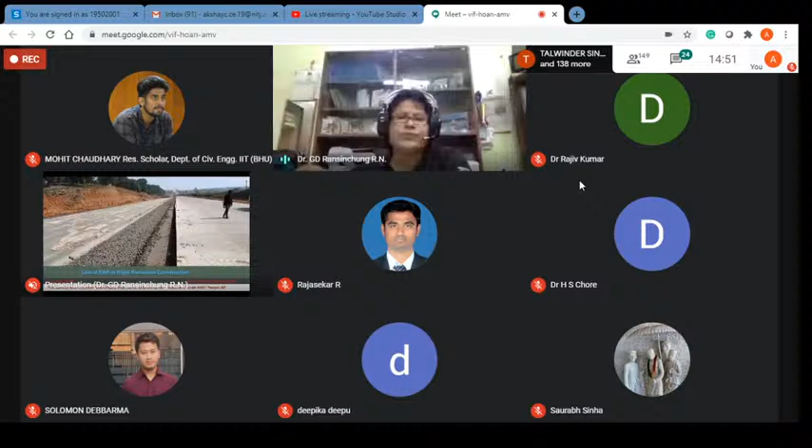Now, the topic is pertaining to construction of rigid pavement, so I thought of sharing with you this slide. This is a rigid pavement, and this particular picture was collected from 4-laning work from Hiran River to Sindoor River. It was part of National Highway number 12 under the National Highway Development Project phase 2 in the state of Madhya Pradesh. I had the opportunity to land up in this particular project as I was invited by the National Highway Authority of India and the consultant and contractors to address few issues.

So during that course of the site visit, I could capture this. I'm just sharing with you to show you the rigid pavement. On the right hand side, the pavement section is the rigid pavement section, rigid pavement slab, or I can say PQC slab. And on the left hand side is the DLC layer, dry lean concrete. So when I talk about the construction of rigid pavement, I cannot ignore the dry lean concrete layer.

So I shall be touching briefly the dry lean concrete part also. In my presentation, I shall be covering these four different heads. First of all, I shall be discussing the RAP materials, followed by RAP materials for dry lean concrete.

As I said, dry lean concrete serves as an upper sub-base in the rigid pavement system. I hope most of you know that in the rigid pavement system, we don't term it as base course. We don't have base course, we have sub-base. So though the GSB is also a sub-base, we term it as a lower sub-base and DLC as an upper sub-base. And then followed by RAP materials for PQC, basically the rigid pavement or cement concrete pavement.

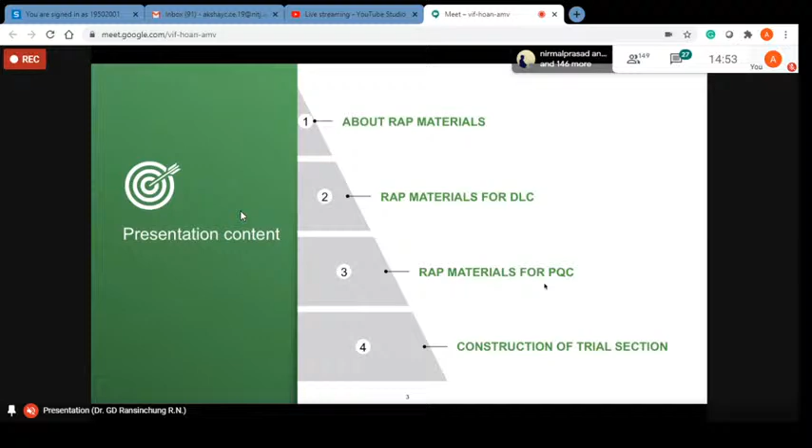And finally, the last part is the construction trial section that we carried out. Whenever we do research work, it is important, essential I would say, for researchers to compare the findings, whatever you get in the laboratory, to be able to get very closely in the field. In an attempt to do that, we have been able to construct a trial section, and in brief I shall be sharing it with you.

Coming to the introduction part, here I'll be briefly talking about the importance of the source of the RAP materials and the methods of collection of RAP, and most importantly, the quantity of RAP materials which are retrievable from the existing road network of the country. Because the idea to carry out this research work is to narrow down the gap between the demand and supply of stone aggregates, construction materials basically, right?

So we have a strong feeling that through this technology, we should be able to bridge, this may be one way out to bridge the gap between the demand and supply of construction materials, which is why I thought this is very important for me to address.

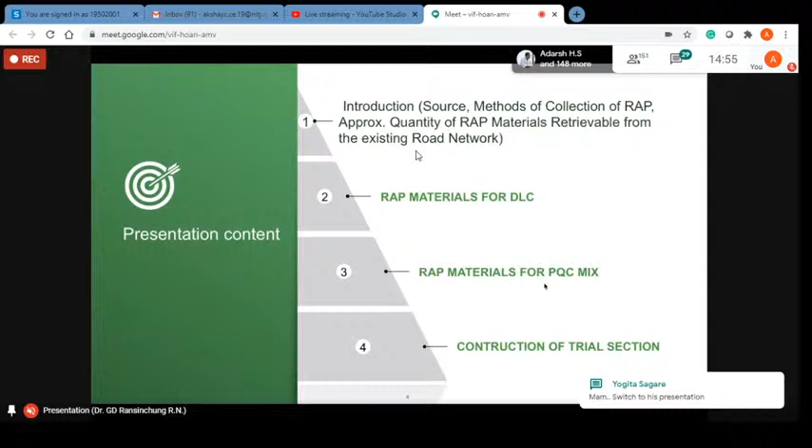And by definition, we can define it this way: it is material generated when old pavements, asphalt layers of pavements, are removed for the purpose of either overlaying or rehabilitation of the pavement, etc. Now, from these cross sections, we can see the RAP materials I'm talking about are the materials, the aggregates, along with the bitumen, right? Along with the asphalt - I can say asphalt and bitumen are the same. So when I name it asphalt, I'm talking about the bitumen. Please understand me in that way.

So this black portion is the bituminous course. Now, depending upon the traffic and the subgrade CBR value, the crust thickness of the pavement section is decided. And based on that, the base course, bound base course, and wearing course thicknesses are also decided accordingly.

So here I have created a situation for our discussion. In our case, 75 mm DBM and 40 mm BC. That means from the particular road section, I shall be able to get RAP materials from these two particular layers only, excluding the WMM and GSB. The WMM is considered an unbound base course, DBM is a bound base course, and BC is the wearing course.

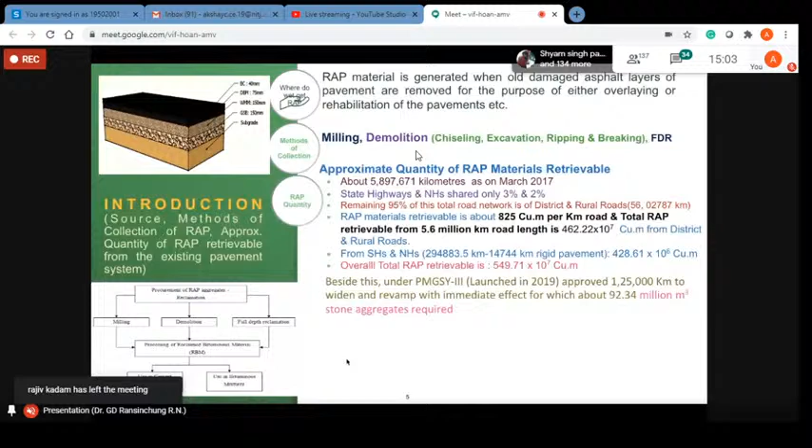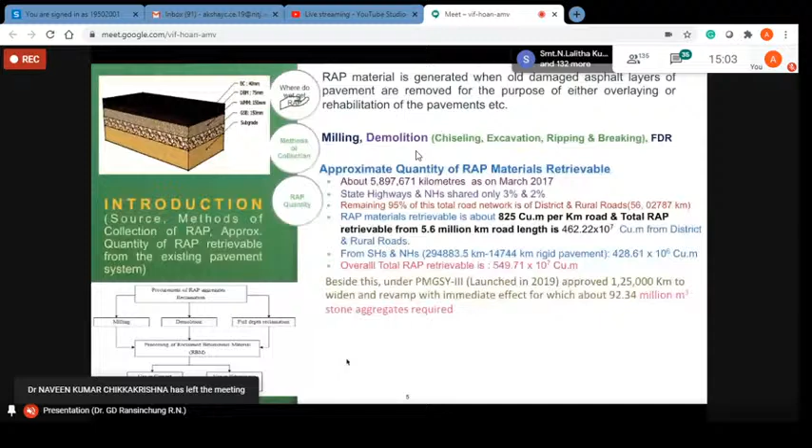Besides this, under the PMGSY-III, launched in 2019 and approved by the government of India, around 125,000 kilometers has to be widened and revamped with immediate effect. For this, when we talk about widening and rehabilitation of the existing pavement, the quantity of aggregates required to meet this construction project comes out to be around 92.34 million cubic meters of aggregates.

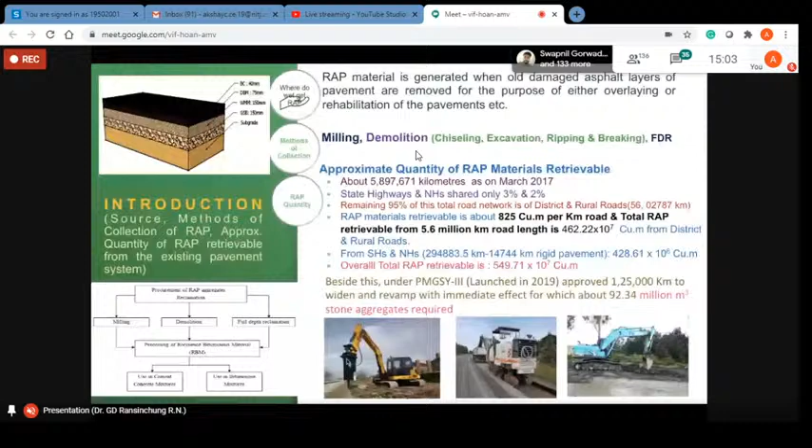Now, these are a few techniques or methods for procuring RAP materials from the existing pavement site.

So I was here. Is this slide visible? Total material required? Yes sir, Rajesh, it is visible. What I'm trying to confirm is the slide that I'm talking about, the thing you are viewing on the right slide. So I'm just again, for instance, what I've done is... Sir, the slide is not visible. Is it? No sir, it is visible, sir. It's fine, sir, one of the participants I think prompted me that... No, no, is it? No, okay, it's fine sir. It is, yes sir, it is okay.

Okay, fine. Then, well, let us continue with our discussion.

So then, what I try to understand is for the sanctioned road network, 1.25 lakh kilometers of PMGSY roads, for strengthening and revamping of this road network, what approximate quantity of materials would be required? That was my thought process.

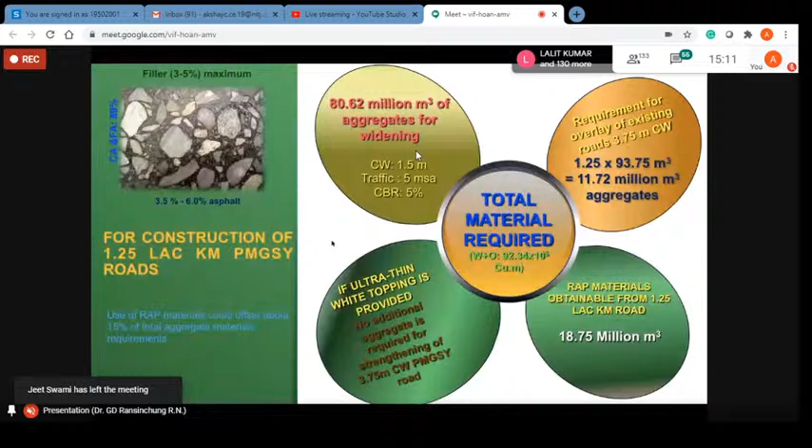Then, on the other hand, the RAP materials retrievable from the 1.25 lakh kilometers of road length would be approximately 18.75 million cubic meters. Now, my thought process is this.

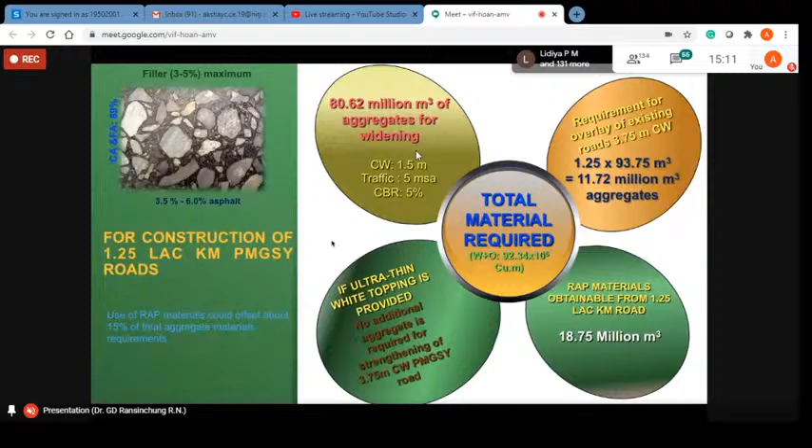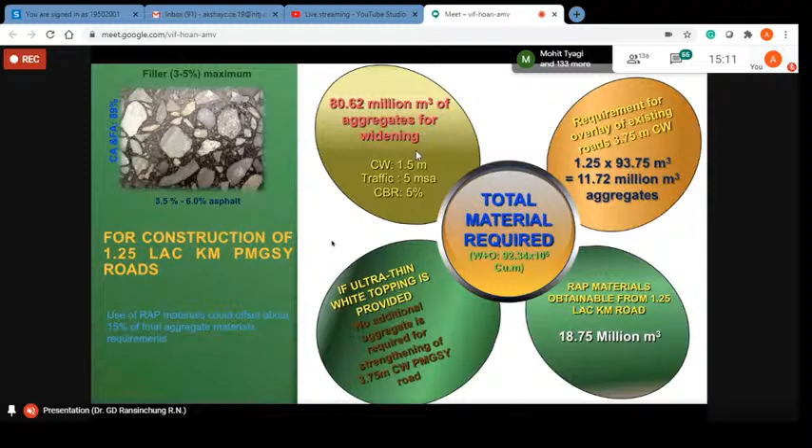If we propose a very ultra-thin white topping instead of black topping, this white topping would be more stronger and durable than the conventional flexible pavement, conventional bituminous courses.

Particularly when I'm talking about the overlaying and rehabilitation part, so why not make use of this material which is already available on site? We don't have to procure, we don't have to transport the material from far away from the quarries, we don't have to operate the quarries.

So the material is considered available on site. And at the same time, most of the PMGSY roads cross the habitations, so if we keep overlaying from time to time, the level of the road would be increasing year by year.

So this particular RAP material, if we remove and then recast at the same level by giving a stronger adhesive like cement, and by creating this concrete mix, and if we provide this as an ultra-thin white topping on the concrete on that particular road stretch, it is going to save, only in terms of construction materials, about 15%, excluding the time.

Time required for excavations, getting material from the quarry, transportation, and again the dumping stackyard - you would require additional machineries, manpower, and so forth. This I'm considering only on materials. About 15% of total aggregate requirement can be brought down. Now, why would we be able to do so?

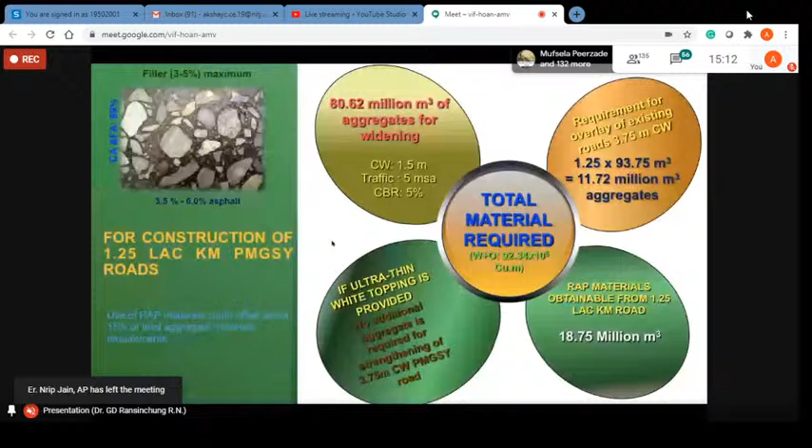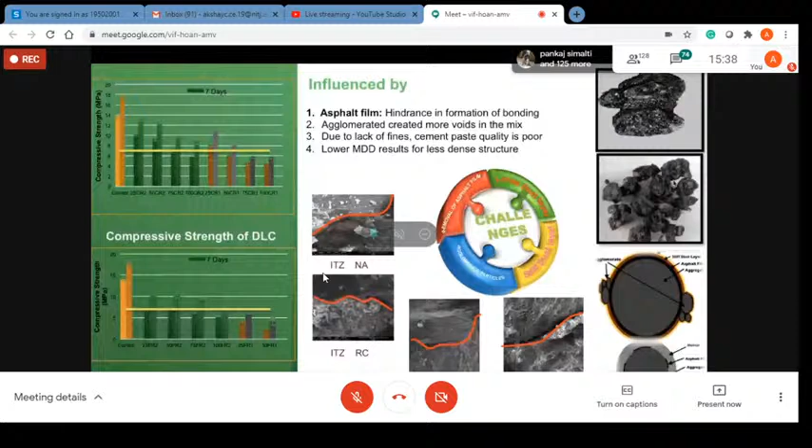From this slide, a few of these pictures I have put here just to deliberate on these agglomerated particles. We can see here clearly, this is the coarse aggregate, with a substantial amount of agglomerated particles around it. This particular image has been developed by Dr. Surender Singh during his research work.

We try to understand exactly what is happening: this is the core of the aggregate, and on top of the core aggregate, this asphalt film is engulfing around it, followed by stiff dust and then loose dust. This kind of phenomena is usually observed from the RAP aggregates which have been kept in the stockpile.

Okay, suppose at a stockyard, if you keep it for a longer period of time, the contaminants would come and stick around the RAP materials, which is why there would be 4 different types of layers, including the asphalt film thickness in the RAP materials.

So the purpose of discussing this phenomena is that, as we understand the concrete matrix, we can establish a good bonding between the coarse aggregate and the hydrated cement paste properly when there is good contact at the interface of the coarse aggregate. In the case of RAP material, it is not able to do so, because the presence of this asphalt film around the aggregates doesn't allow the hydrated cement paste to come and form a bond.

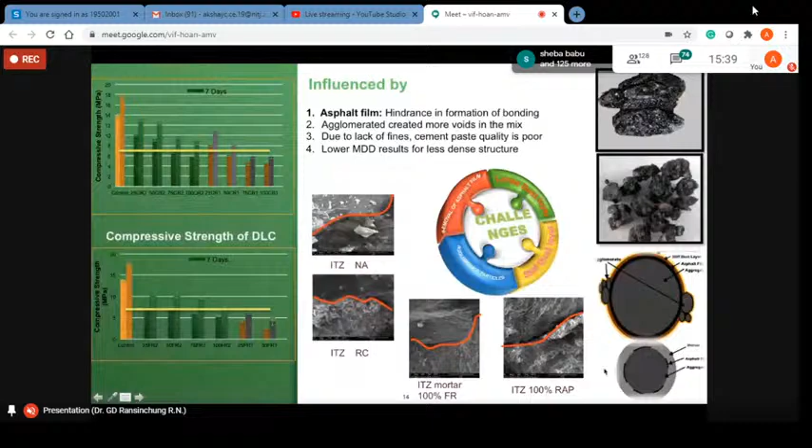So what I'm trying to show in this slide is how the PQC mix is being formulated. The grade of concrete we consider is M40, and the formulation of the concrete mix was done as per IRC 44. Importantly, MoRTH Clause 602 states that the maximum cement content for rigid pavement construction should not exceed 425 kg per cubic meter. The reason is that adding more cement content in the concrete mix increases the chances of shrinkage cracks in the concrete matrix.

So in order to prevent this kind of unwanted shrinkage cracks appearing on the concrete surface, the maximum cement content has been limited to 425 kg per cubic meter. Since our study pertains to replacement of good quality aggregates by slightly inferior quality aggregates, we decided to go with the maximum recommended cement content for construction of cement concrete pavement, and a water cement ratio of 0.38 was adopted.

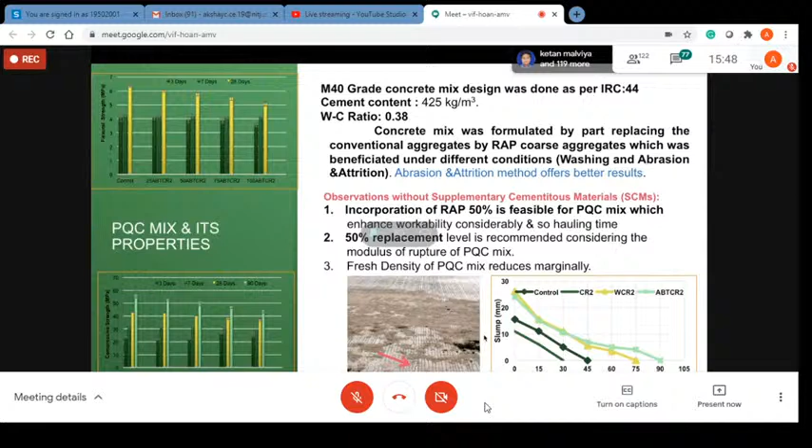The concrete mix was prepared and the study was conducted for different beneficiation methods. Washing is one beneficiation method we adopted, and abrasion and attrition is another method. We are not considering chemical beneficiation methods here. Of these, the abrasion and attrition method offered better results, so we decided to adopt this method for further course of action.

The data I'm presenting here is without admixing supplementary cementitious materials—only partial replacement of conventional coarse aggregates by the RAP materials. This is a small example showing shrinkage cracks happening on concrete slabs. In order to avoid this kind of cracking, we have to limit the cement content per cubic meter of concrete.

Now these are the graphic bar charts prepared from the findings of the laboratory studies, for different percentage replacement levels—25%, 50%, 75%, and 100%—that we tried. This slide is confined only to the abrasion and attrition method; we're not talking about other beneficiation methods here. Through this method, incorporation of RAP at 50% is feasible for the PQC mix.

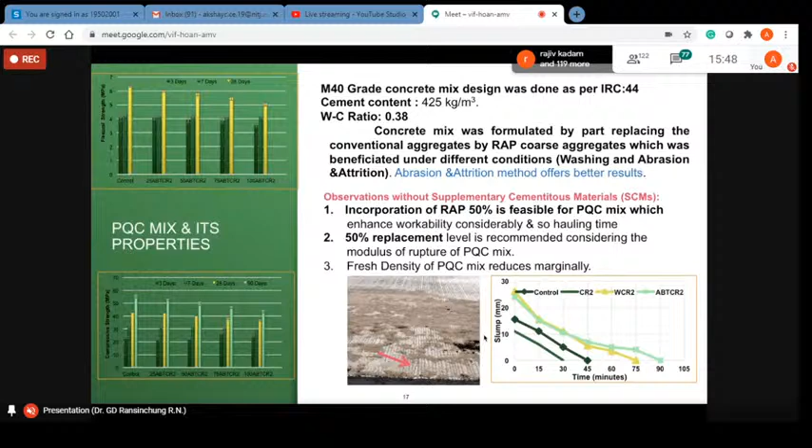Higher improvements in flexural strength as well as in compressive strength were offered by the mix combinations having silica fume 10%, followed by bagasse ash 5% and fly ash 20% respectively. Irrespective of the replacement level, for compressive strength and modulus of rupture, all of these considered mixes qualify the minimum stipulated compressive strength as well as modulus of rupture. The only thing is that we have to admix these mineral admixtures in recommended dosages.

In our research endeavor, we have also studied the durability properties of concrete, but I'm not going to address that here.

After the laboratory investigations, after comprehensive laboratory studies, we attempted to come up with a trial section. We decided the trial section shall have at least 4.5 meter of slab span and a 3.5 meter width of slabs, having a shoulder on either side of 0.5 meter each, that is basically the tied concrete shoulder.

This condition is required in IRC 58:2015. When we design, there are conditions for tied concrete shoulder and untied shoulder, without shoulder. So we considered the tied concrete shoulder while designing the rigid pavement section.

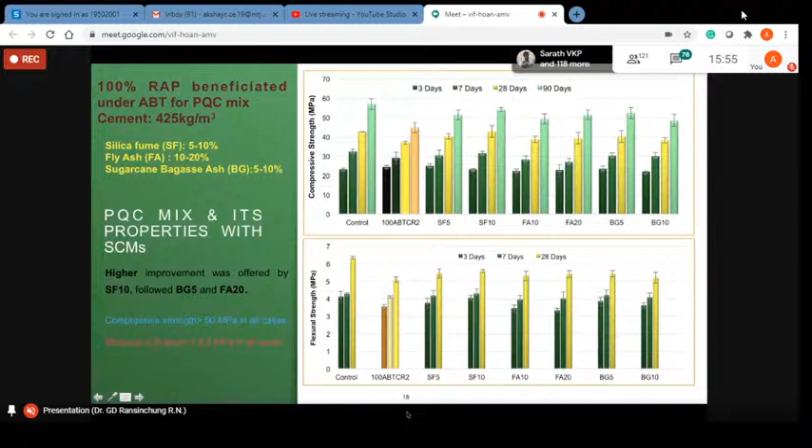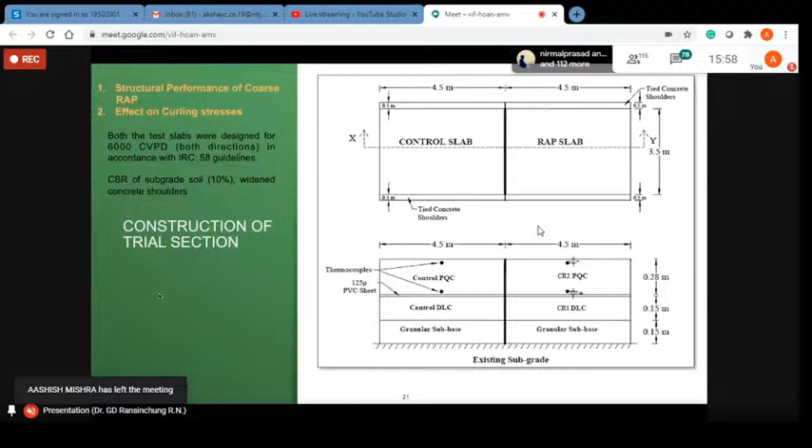In the construction of this trial section, we considered the GSB layer of 150 mm, dry lean concrete of 150 mm, and PQC slab of 280 mm. This trial was designed for traffic of 6,000 commercial vehicles per day, both directions, in accordance with IRC 58 guidelines.

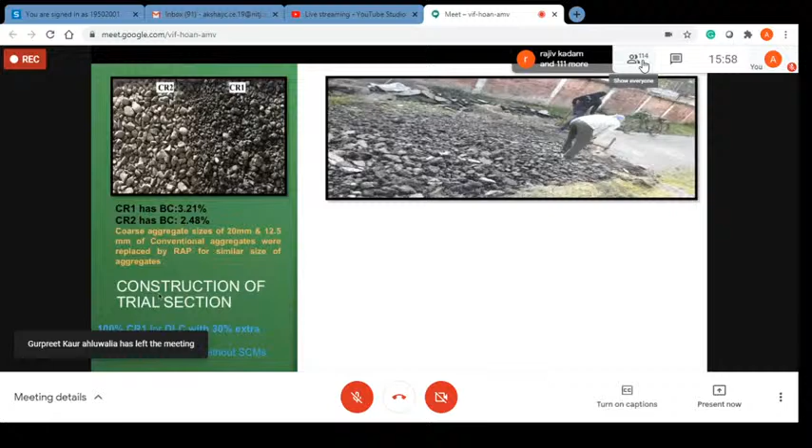We considered the subgrade CBR value to be about 10%, because this trial section was carried out on the existing pavement section, and we assumed there has been sufficient consolidation effect. Therefore, a subgrade CBR of 10% was considered.

For the construction of this trial section, it was 50 meters, but we considered 9 meters: 4.5 meters for conventional concrete mix, and another 4.5 meter span for the concrete mix incorporated with the RAP materials.

Now, how did we do that? Let me explain. Here we can see CR1 and CR2. CR1 is the RAP material obtained from one source, and CR2 is also a RAP obtained from a different source. To simplify our discussion, let me proceed with respect to bitumen content.

For CR1, the bitumen content of the mix was around 3.21%, and CR2 has a bitumen content of around 2.48% by weight of mix. The coarse aggregate sizes of 20 mm and 12.5 mm of conventional aggregates were part replaced by RAP material of the similar size of aggregates.

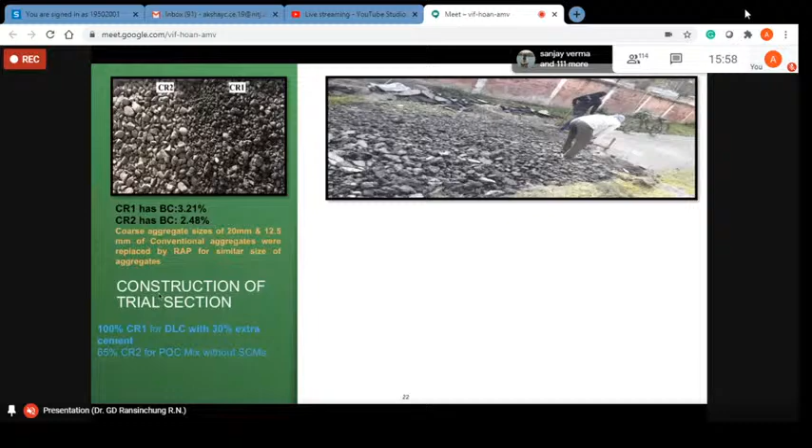On top of this DLC layer, a separation membrane, 125 micron thick, is provided, sandwiched between the DLC layer and the PQC layer to act as an anti-frictional layer. There are many distinct purposes for having this; one of them is to break the bond between the DLC layer and the PQC slabs.

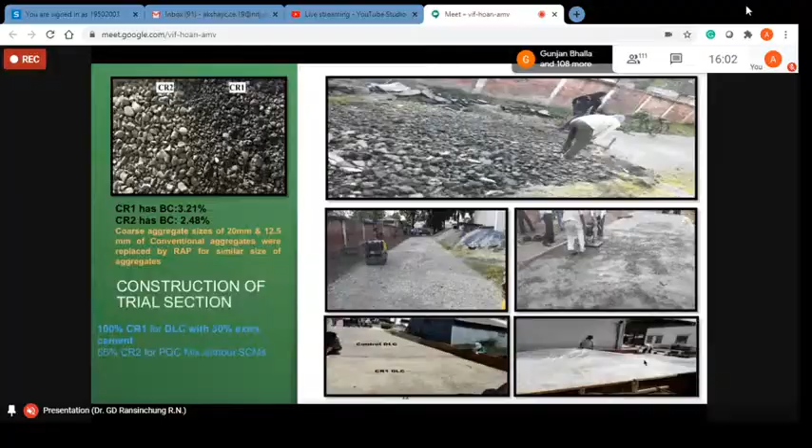So this is how I'm almost completing my presentation. I hope you are all following me well. Now, after this construction, the PQC layer was constructed, and during the construction, what we have done is...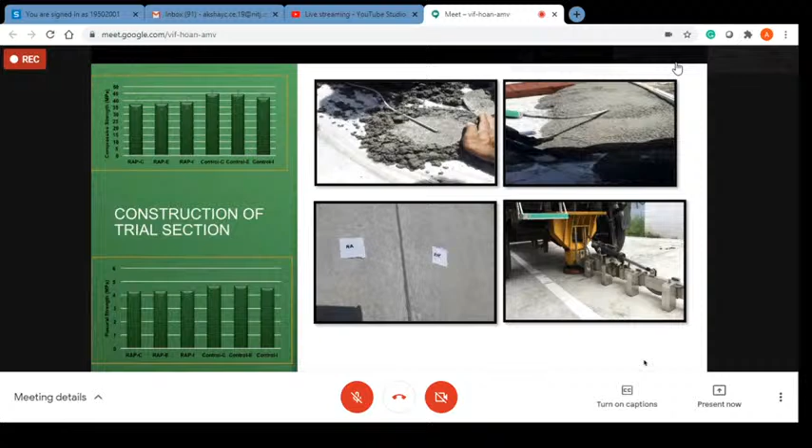Here, these are thermocouples. Several thermocouples were embedded inside the concrete matrix, one at the top and one at the bottom of the concrete slab, so that the temperature sensed by the slabs through these thermocouples can be recorded properly, allowing the temperature differential at the top and bottom of the concrete slab to be analyzed.

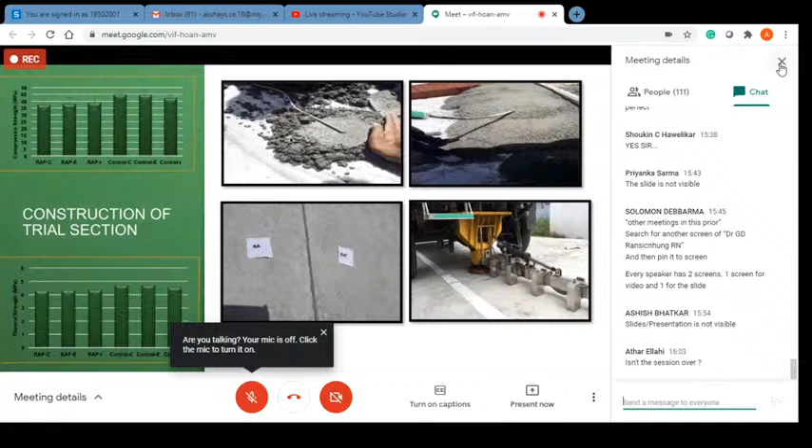Thereafter, the concrete PQC mix is poured. This is NA, the PQC slab constructed with natural aggregates, and this is the concrete slab constructed with RAP materials, part replacing the natural aggregates up to 65%.

This is the falling weight deflectometer measuring the mechanical properties of the concrete for different pavement sections, for natural aggregates and for RAP materials. This mapping has been done such that we tested one at the corner, one at the edge, and one at the interior of the slab.

The average value of this FWD was noted, and this FWD was conducted in accordance with IRC 117. Accordingly, the modulus of rupture and compressive strength and modulus of rupture were found. From this, we understood that 65% part replacement of natural coarse aggregate is very much doable.

Then, from the temperature differential study, what we learned is, the main purpose of conducting this task is to check the combined stresses, which is basically...

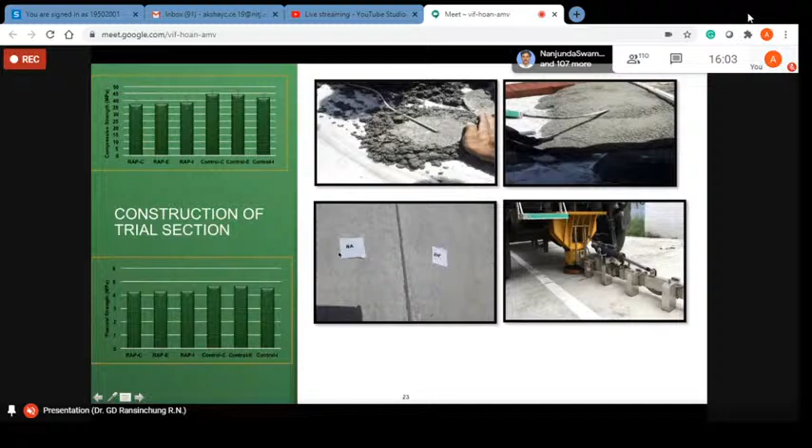Professor Rajiv? Yes, sir, then you may have to help me again. Now you have to help me in this process. Shall I go back to this? Shall I remain on this thing? Sir, you go to Google. Okay, shall I go to Google? You can go to the Google Meet, sir. Google Meet, okay. And stop sharing, sir, the option will come, stop sharing, stop presenting. In people, there is a list of people, there also you can find your name. Otherwise, on the same slide, you can stop the sharing, sir. Otherwise it's okay, sir, no problem. Yeah, I am audible to them, right? Yes, sir. Anyways, please.